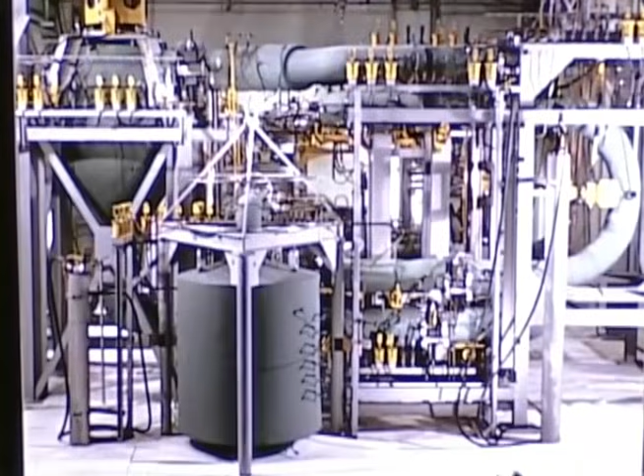Molten salt reactors for the production of electrical power were studied at Oak Ridge National Laboratory from 1957 to 1960. Design studies and technological developments strongly indicated that molten salt breeder reactors operating on a thorium cycle could be developed to produce low-cost electricity and conserve our uranium resources.

A reactor experiment, however, was required to demonstrate the feasibility of this unique high-temperature fluid fuel reactor concept. As a result, the United States Atomic Energy Commission in 1960 authorized the laboratory to design, construct, and operate the Molten Salt Reactor Experiment, also known as MSRE.

Preliminary design of the reactor began in May 1960. Technology developed by the earlier Aircraft Nuclear Propulsion program at the laboratory was used as a basis for designing the MSRE.

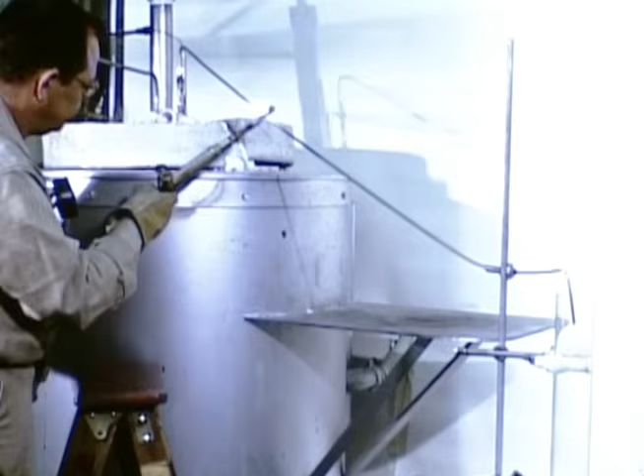The molten salt fuel for this reactor is radically different from that used in solid fuel reactors. Here, salt flows from a pipe which is heated to keep the salt molten. At 1200 degrees Fahrenheit, the salt does not react with air. It flows like water, but does not boil.

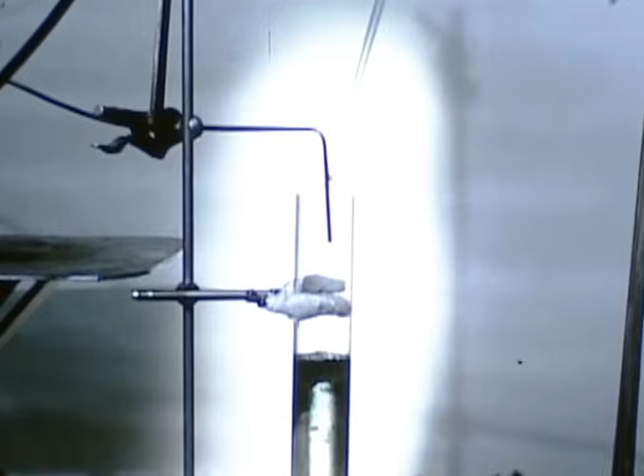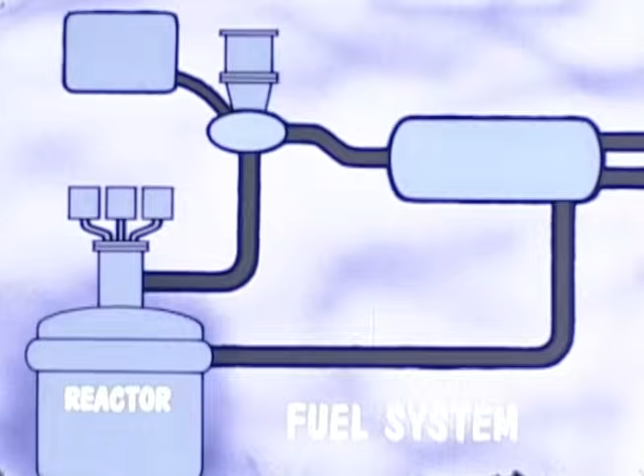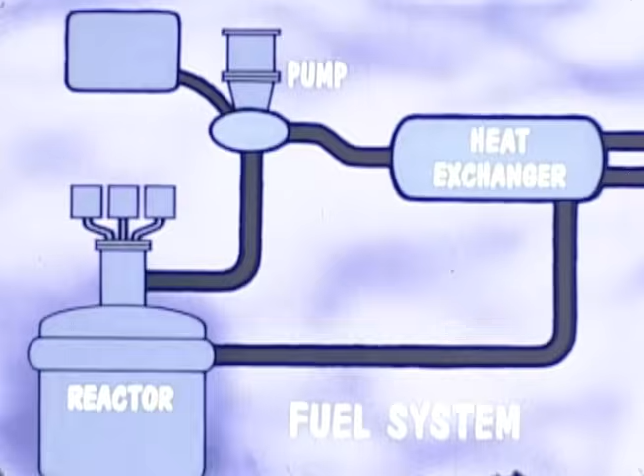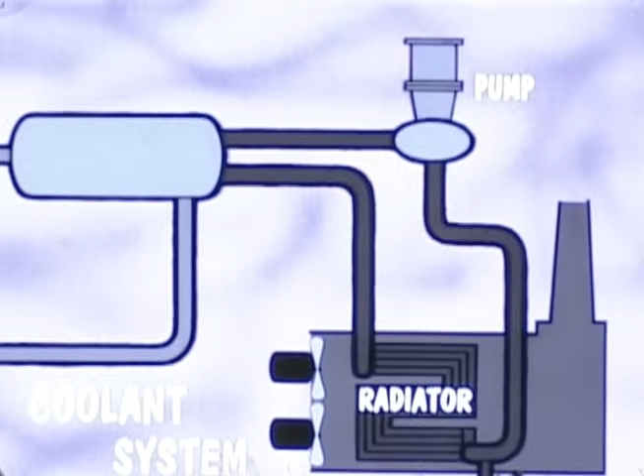The Molten Salt Reactor Experiment utilizes a fuel system which includes the reactor core, in which heat is generated, a heat exchanger for transferring heat from the fuel salt to coolant salt, a sump-type centrifugal pump for circulating the fuel, 3 salt storage tanks, and the connecting piping. The MSRE coolant system consists of a circulating pump, a salt-to-air radiator, a salt storage tank, and the connecting piping.

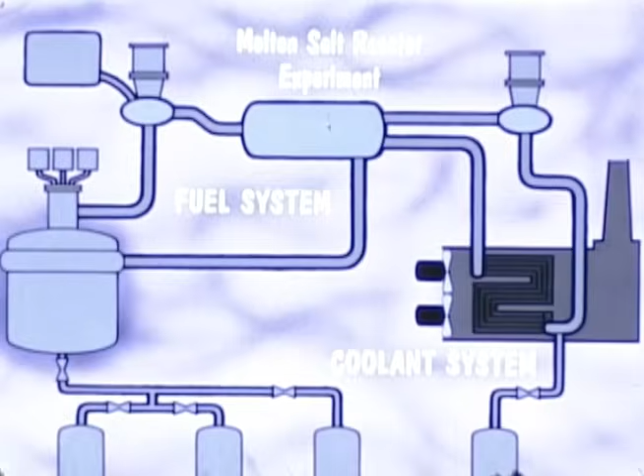Both systems were designed for 1300 degree Fahrenheit temperature and 50 psig pressure. MSRE is a circulating fuel, graphite moderated, single region reactor capable of generating 7,500 kilowatts of heat.

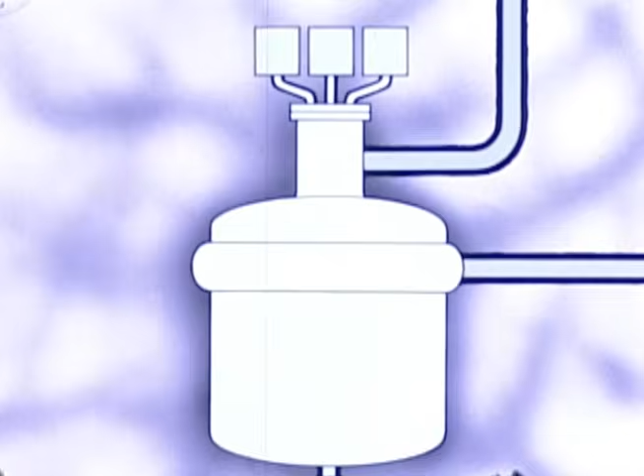During operation of the reactor, the fuel, which is nearly as fluid as water at the elevated temperature of 1170 degrees Fahrenheit and 20 psig, enters the flow distributor near the top of the vessel and spirals downward in turbulent flow through the space between the vessel and core can.

The fuel is then directed upward in laminar flow through channels machined in graphite bars of the core matrix, where heat is generated by the fissioning of uranium-235. The fuel leaves the reactor 40 degrees hotter than it enters.

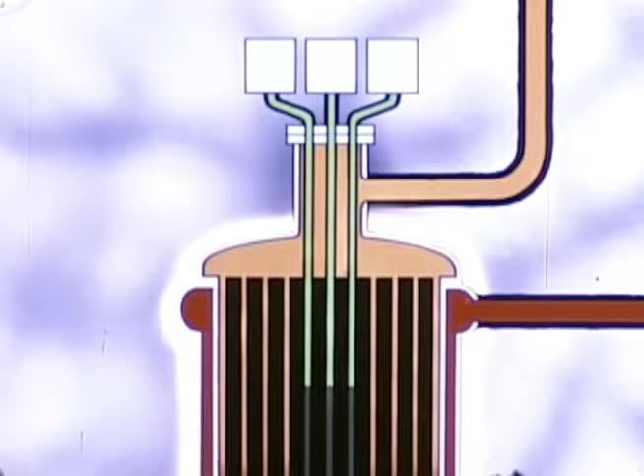A simple control system of 3 flexible control rods helps to regulate the power and temperature. The fuel pump, operating at 1,200 gallons a minute, obtains its suction directly from the reactor.

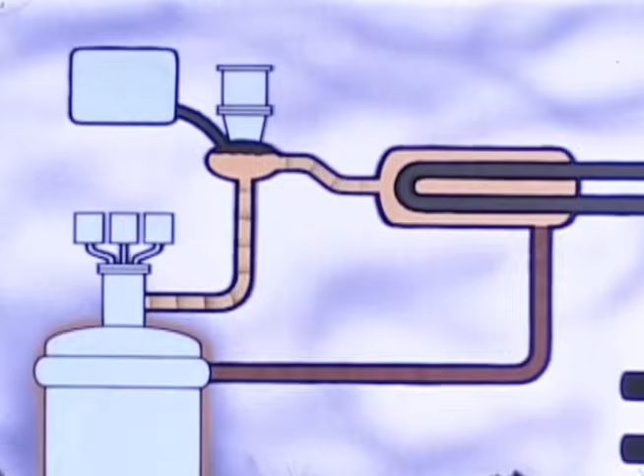At maximum power, the salt, which is now 1,210 degrees Fahrenheit, is discharged by the fuel pump and flows through the primary heat exchanger and then back to the reactor. Gaseous fission products, which interfere with the chain reaction, are removed from the circulating salt stream in the pump tank.

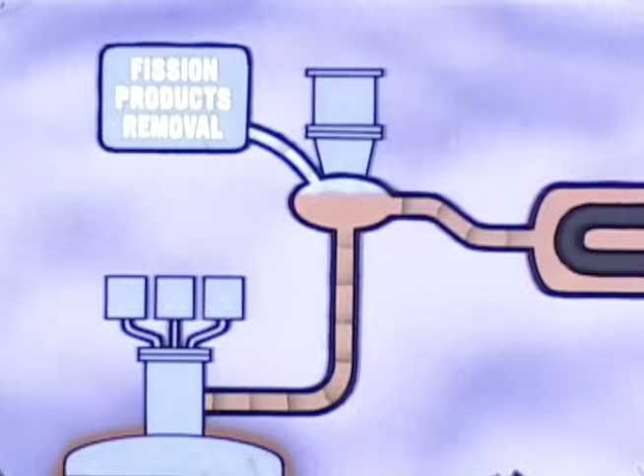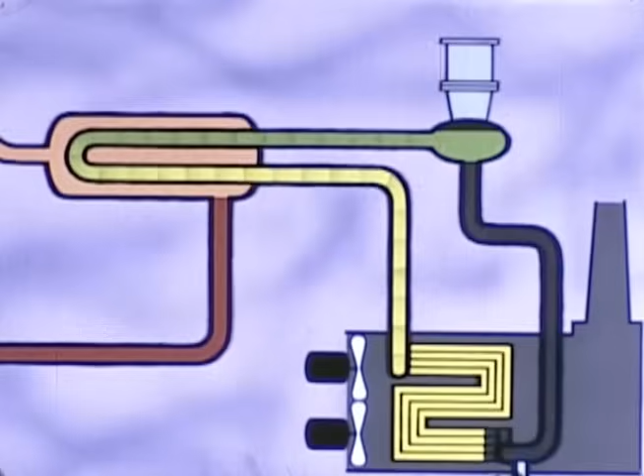The coolant salt is circulated by a sump-type centrifugal pump, similar to the fuel pump. It flows through the heat exchanger and leaves at 1,070 degrees Fahrenheit after a temperature rise of 60 degrees. Heat from the coolant salt is transferred to air in the radiator. Supplied by axial flow blowers, the cooling air is forced across the radiator and up the stack.

Major components of the fuel and coolant salt circulating systems are connected by 5-inch piping and smaller fill and drain lines. During operation of the reactor, the molten salt is held in the whole system by special freeze valves.

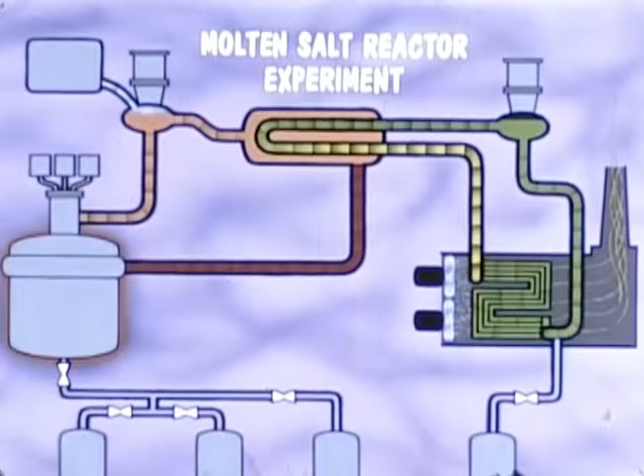The fuel, solid at room temperature, is composed of lithium, beryllium, zirconium, and uranium fluoride salts. A third of the uranium is fissionable U-235.

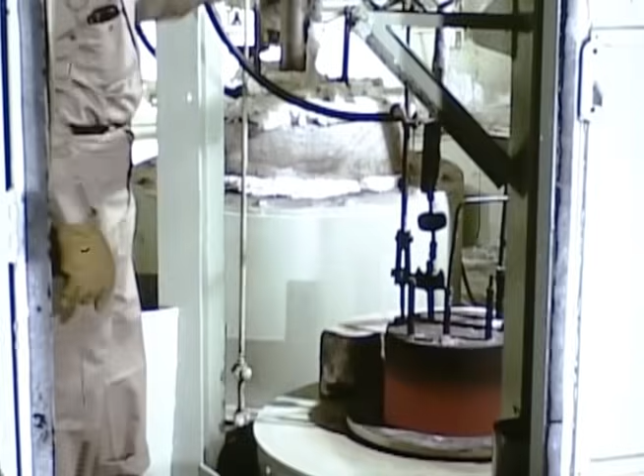The coolant is a fluoride salt mixture like the fuel, but it does not contain uranium or zirconium. These mixtures were produced at the laboratory by using techniques developed during the Aircraft Nuclear Propulsion program.

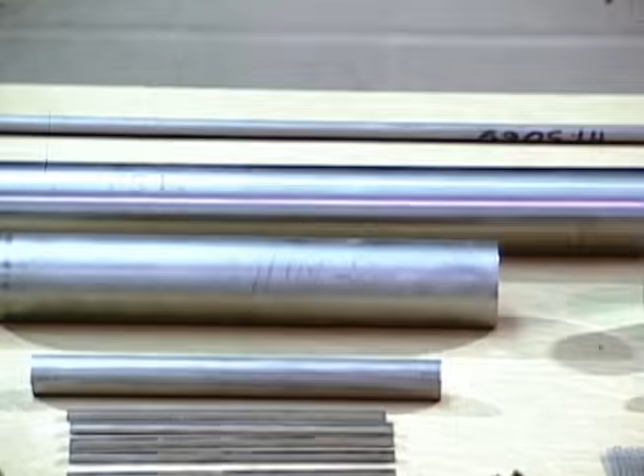The salt-containing piping and components are fabricated from Hastelloy N, a special nickel-molybdenum alloy developed at Oak Ridge, which has good resistance to corrosion attack by fluoride salts up to 1500-degree temperatures.

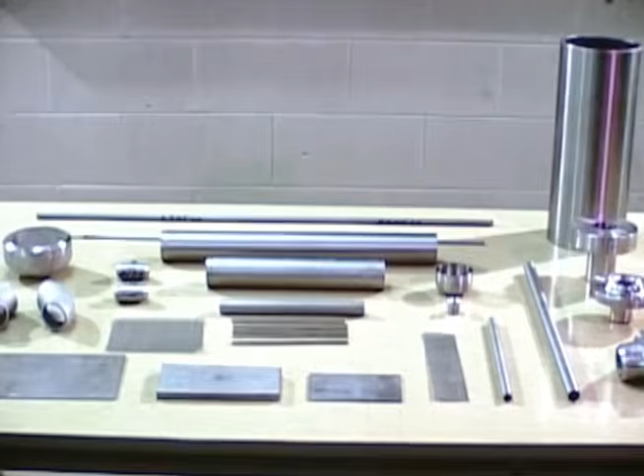The MSRE was designed to utilize the 1954 Aircraft Reactor Experiment facilities. The ARE was the first molten salt reactor to use circulating fused fluorides as fuel. It operated at 2,500 kilowatts in this building.

Building modifications extended from early 1961 through mid-1962. The MSRE fuel storage cell and other areas are new, but most of the former facility was modified only slightly.

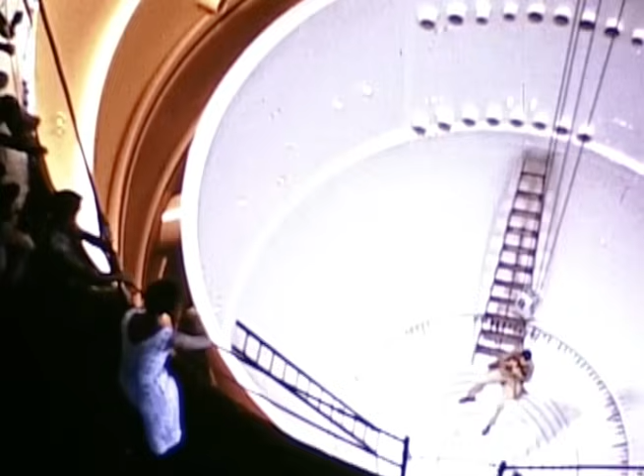The fuel circuit steel containment vessel, 24 feet in diameter, had to be lengthened. It was then stress relieved by gas heating.

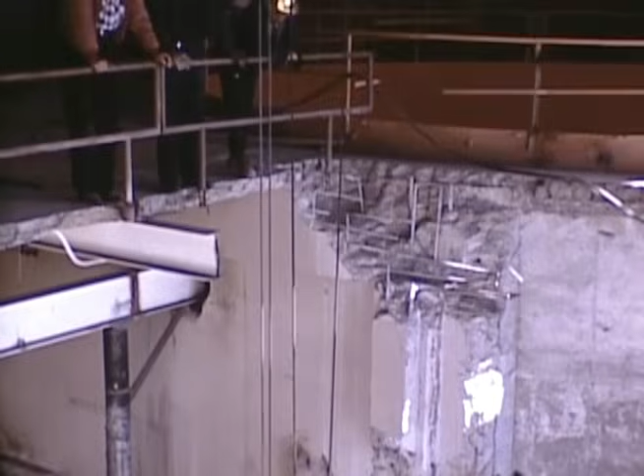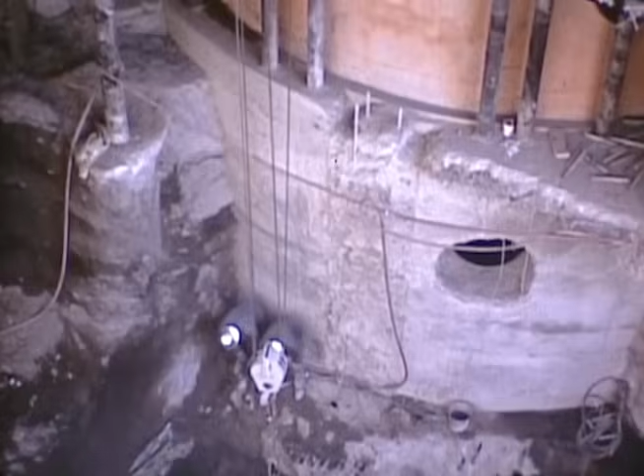The vessel is located in another cylindrical steel shielding tank. For biological shielding, the lower portion of the annulus between the tank and vessel was filled with magnetite sand and water, and the upper end with magnetite concrete.

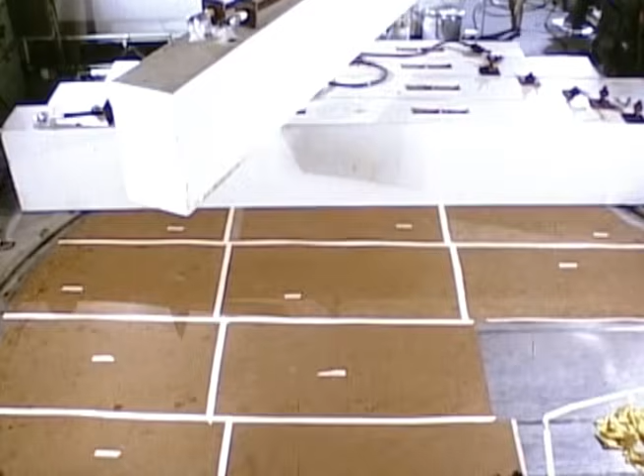The cover for the containment vessel consists of 2 layers of 3.5-foot thick magnetite concrete blocks, separated by a welded stainless steel membrane. The concrete serves as a biological shield and as a support structure for the pressure-tight cell.

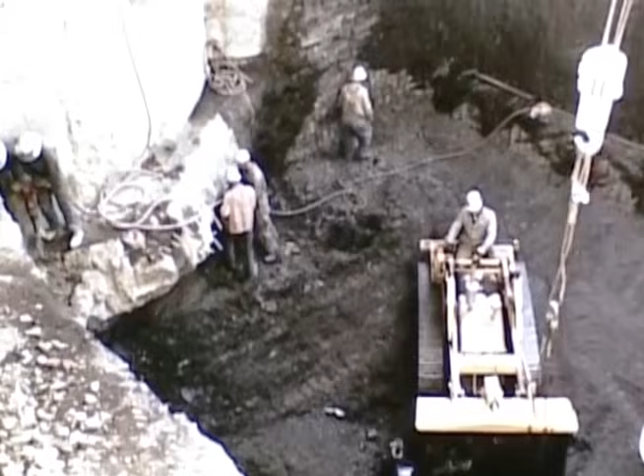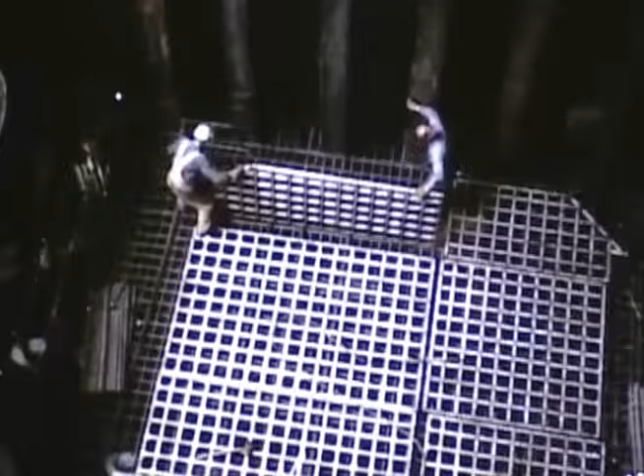Considerable excavation was necessary at the fuel storage cell to permit gravity drain of fuel from reactor to storage tanks. The cell's bottom and sides are stainless steel, backed by heavily reinforced concrete. This pressure-tight cell is also covered with 2 layers of reinforced concrete blocks separated by a welded stainless steel membrane seal.

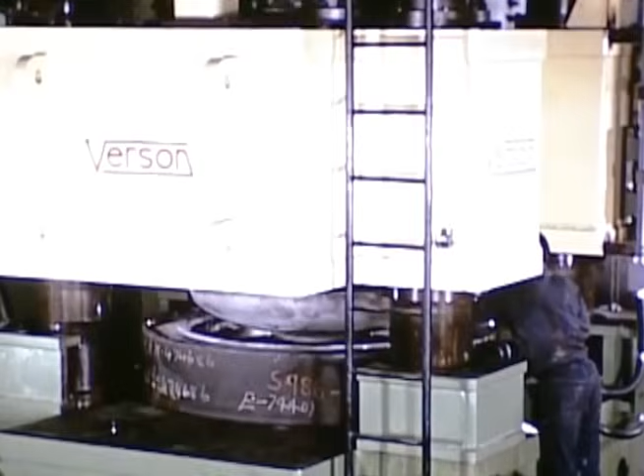Dished heads for the reactor vessel were cold pressed from 1 1/8 inch thick Hastelloy N alloy plates. The reactor vessel's fuel inlet flow distribution channel was also cold formed, as were most of the Hastelloy N alloy parts.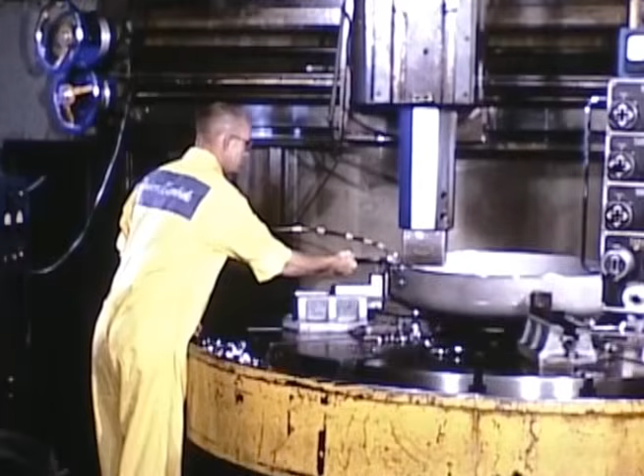Some development work was needed to fabricate major components. It was found generally that Hastelloy N presented no more problems than other high nickel alloys or stainless steel.

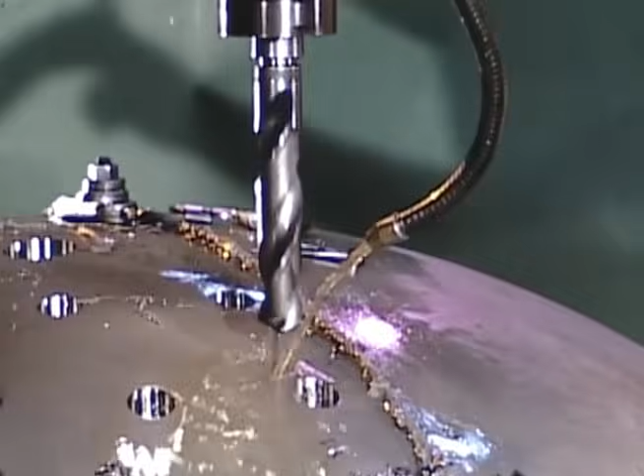Assembly of the reactor vessel began in mid-1962.

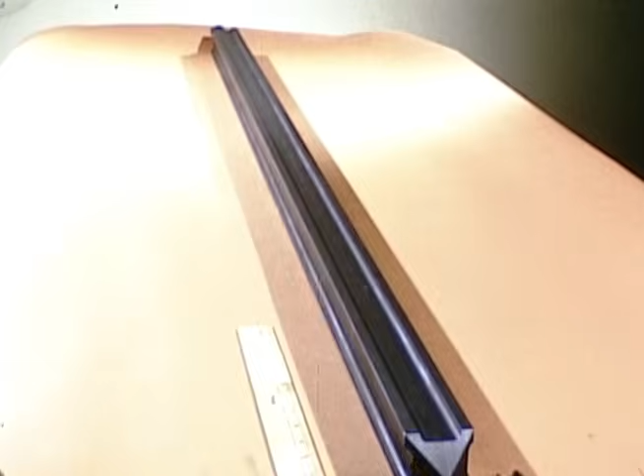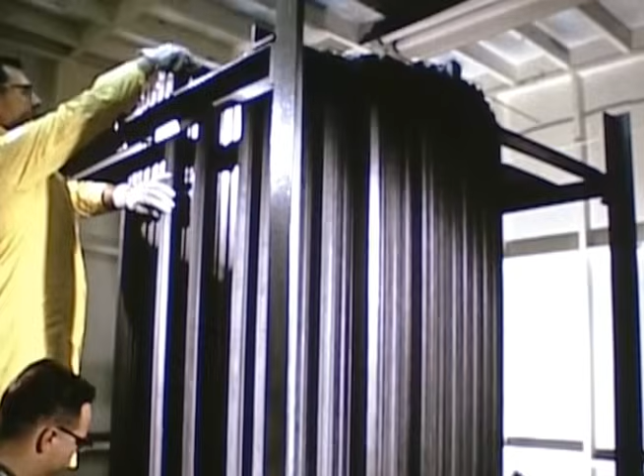By the fall of 1963, special graphite, with low salt absorption and low permeability to gases, had been commercially produced and precision machined. The reactor core of nearly 600 vertical graphite bars was carefully assembled on a graphite lattice within a clean room.

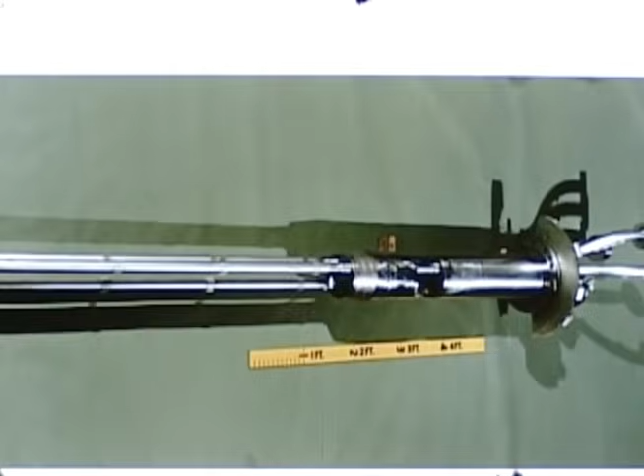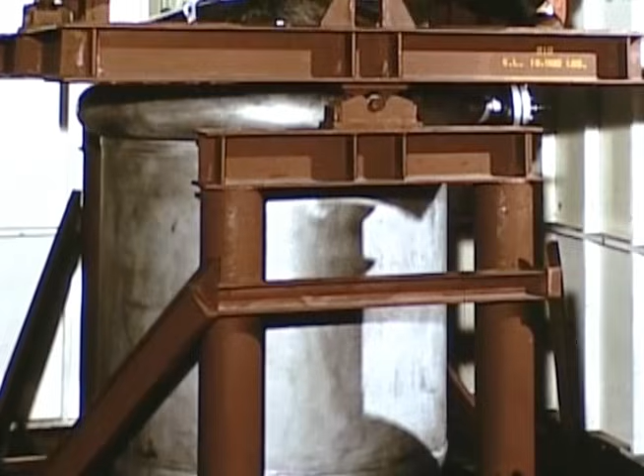A removable control rod thimble assembly for the reactor was fabricated separately. The 5-foot diameter reactor with core and control rod assembly weighs about 9 tons. This special shipping fixture held the reactor vertical during its journey from shop to reactor site.

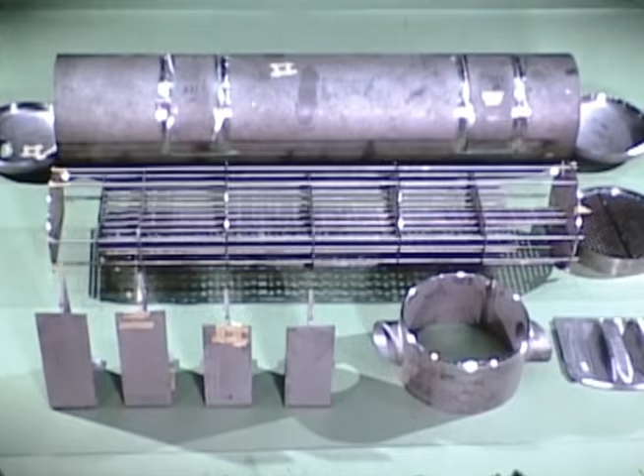The horizontal shell and tube primary heat exchanger is about 8 feet long. Its U-shaped tubes, a 1/2 inch in diameter, were fusion welded and furnace back brazed in a hydrogen atmosphere to the tube sheet. The bundle contains spacer bars tightly laced in 2 directions through spaces between the triangular pitched tubes to eliminate flutter and vibration.

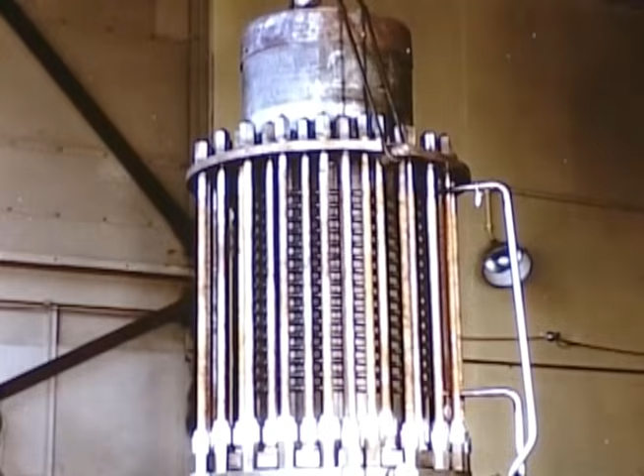The fuel salt pump bowl serves as the pump sump and surge volume to allow for expansion of the salt. This fuel pump rotary element with water-cooled drive motor, bearing assembly, bolt extensions for remote replacement, and impeller circulated molten salt at 1200 degrees during the non-nuclear run-in test.

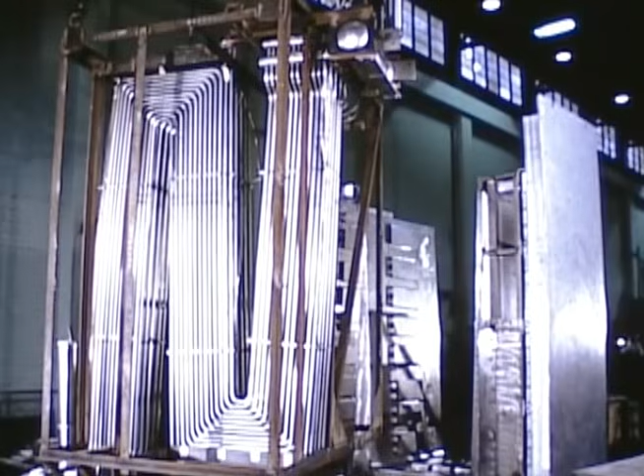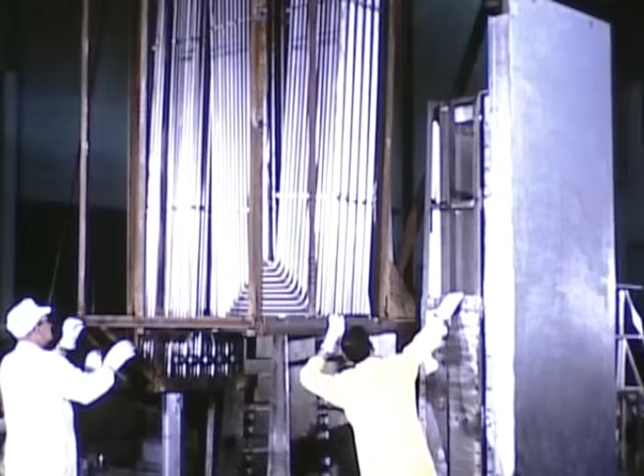The salt-to-air radiator tubes, each 3/4 of an inch in diameter, are arrayed in banks of 12 tubes each. Special assembly fixtures were required to accurately position the tube banks and subheaders for welding and assembly. The radiator enclosure and coil were fabricated separately, then assembled after removing one end of the enclosure.

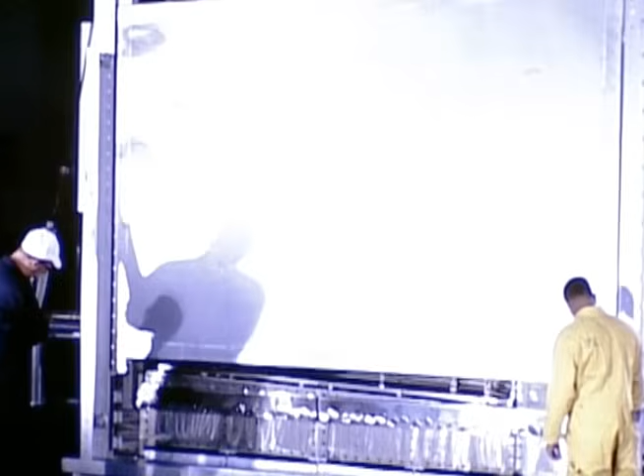The enclosure, which supports the radiator coil, is a furnace containing electric heaters to prevent uncontrolled freezing of the salt. Adjustable doors and dampers control airflow through the radiator to regulate heat removal.

Tanks provide safe storage of salt mixtures when the fuel and coolant salt circulating systems are not operating. These include 2 fuel storage tanks with bayonet tubes and steam dome in which fission product decay heat is removed by flashing water to steam.

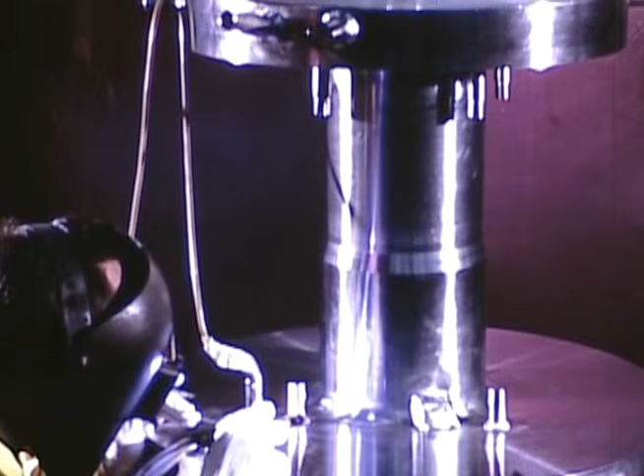Several thousand high-integrity reactor-quality welds of Hastelloy N alloys were made during fabrication of major components. The history of each was recorded for future reference.

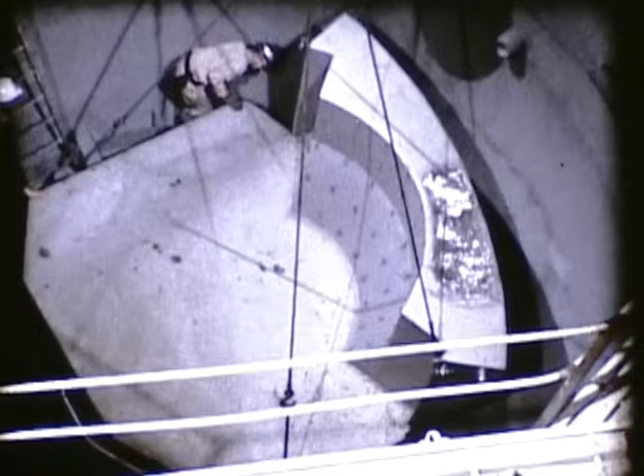Installation of fuel circuit equipment in the reactor cell began in January 1963 with the placement of the thermal shield base and cylindrical section. The thermal shield is a double-walled stainless steel vessel which surrounds the reactor and shields equipment in the cell from neutron fields.

The annulus is filled with water and carbon steel balls for primary shielding. The shield also provides a support for the reactor vessel.

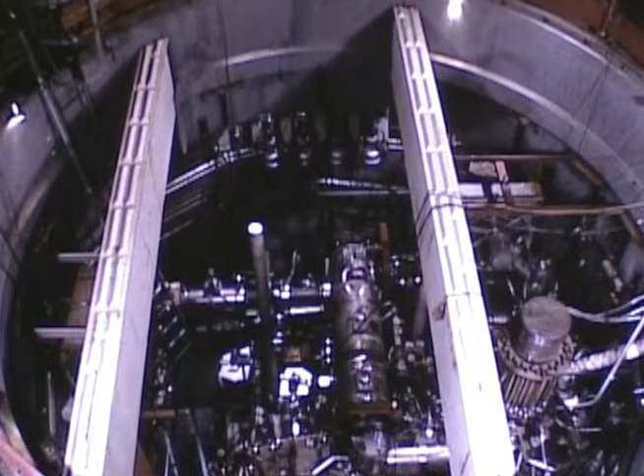One objective of the MSRE was to ensure remote replacement of all equipment in the reactor cell. To locate equipment during installation and replacement, a large assembly fixture was constructed outside the cell on which the reactor, fuel salt circulating pump, primary heat exchanger, and connecting piping and disconnects were accurately located by optical tooling methods.

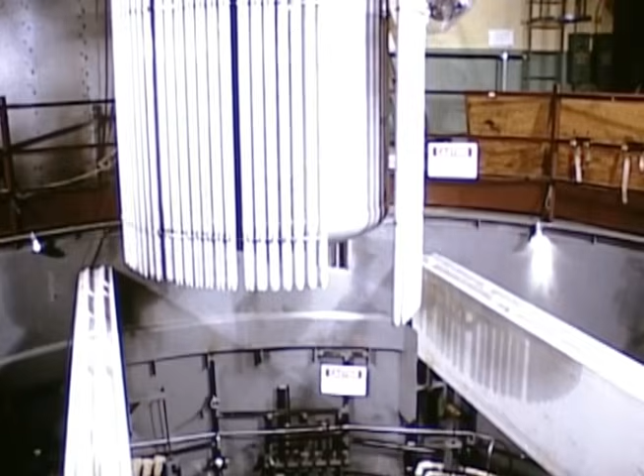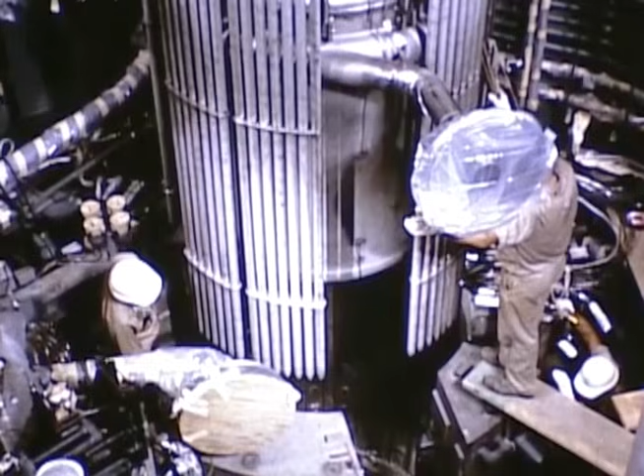After the connecting piping and auxiliary equipment were attached by using the fixture, the reactor was lowered into the thermal shield. Connecting pipe bends and welds were normalized at a temperature 450 degrees higher than normal salt operating temperature to minimize movement of pipe disconnects after the fuel salt had circulated.

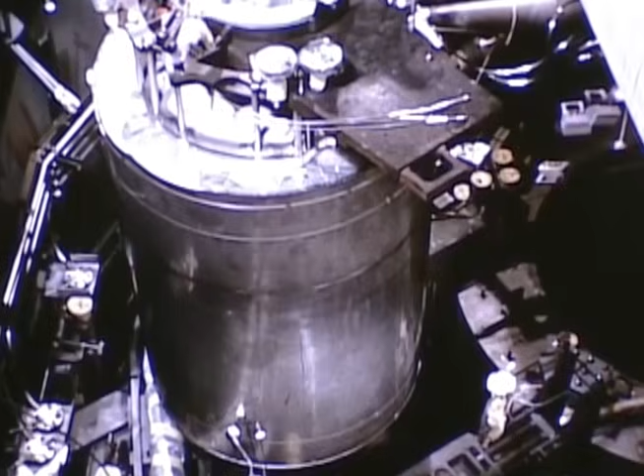The same procedure was followed for the fuel salt circulating pump bowl and furnace. Installation of the pump was completed with the addition of the pump rotary element, drive motor, auxiliary piping, and electrical connections.

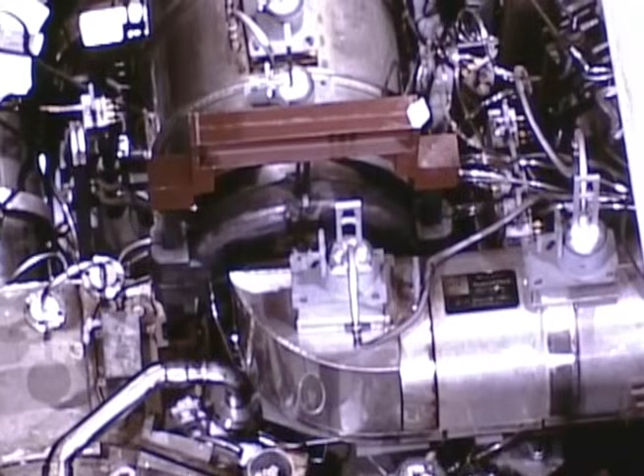Special freeze flanges in the fuel salt circulating piping permit the removal and replacement of major components, such as the heat exchanger.

All components and connecting piping in the salt circulating systems are heated electrically to maintain the system above the salt freezing point of 840 degrees. The equipment is preheated before salt is added.

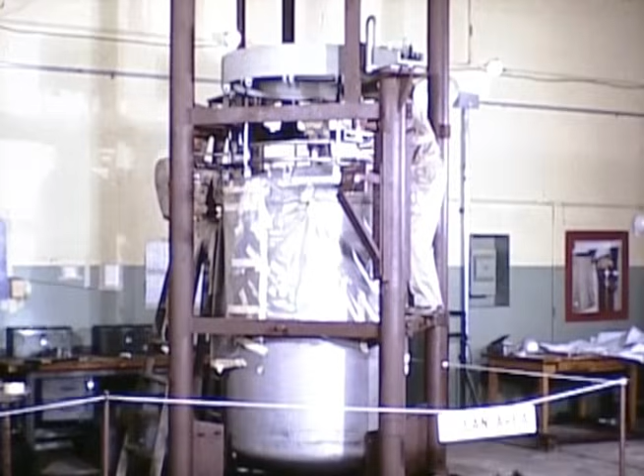The fuel storage tanks and related equipment were installed by using assembly fixtures, and the same procedure was utilized for the main fuel circuit.

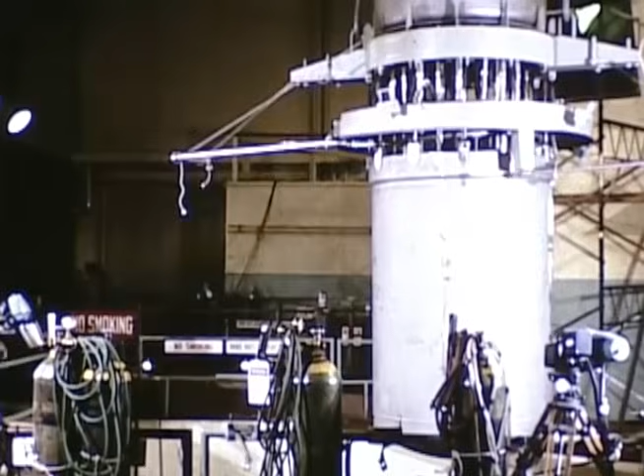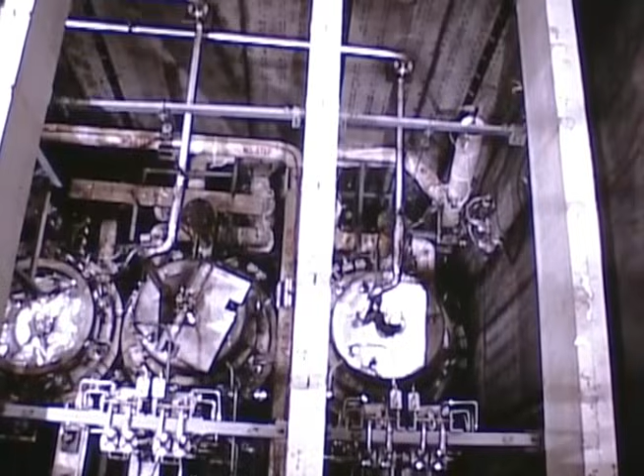The fuel storage tanks with steam cooling systems were positioned inside the electric furnaces. The salt piping and all auxiliary services, including instrumentation and controls, were thoroughly checked for leaks and electrical continuity.

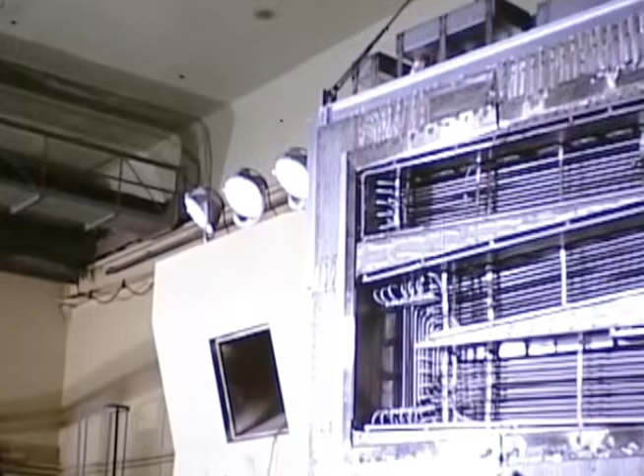Since heaters and thermocouples as well as the coil were installed in the radiator enclosure at the shop, no additional work was required before the radiator was placed in the coolant cell. Installation of the radiator, salt storage tank, and circulating pump completed the coolant circuit.

The MSRE incorporates some novel features and components designed and developed specifically for molten salt reactors. Performance data on these items permit the evaluation of ideas and principles which might be employed in breeder-type molten salt reactors.

It is planned to remove impurities and recover uranium from the fuel salt in this on-site processing facility.

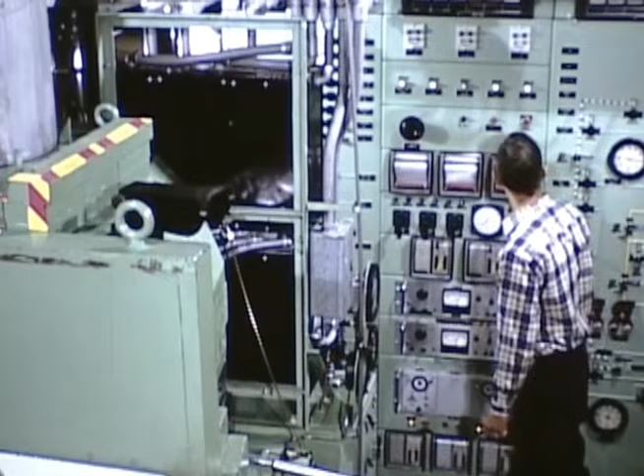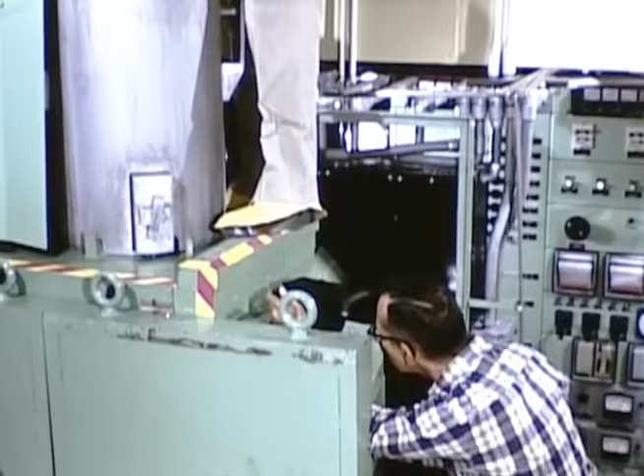The sampler enricher is a unique device for sampling and adding fuel during full power operation of the reactor. A power-driven cable remotely lowers a small bucket into the liquid salt of the pump bowl, and then raises the bucket into a manipulator area for transfer to a shielded container.

More than 300 samples have been obtained routinely by this method.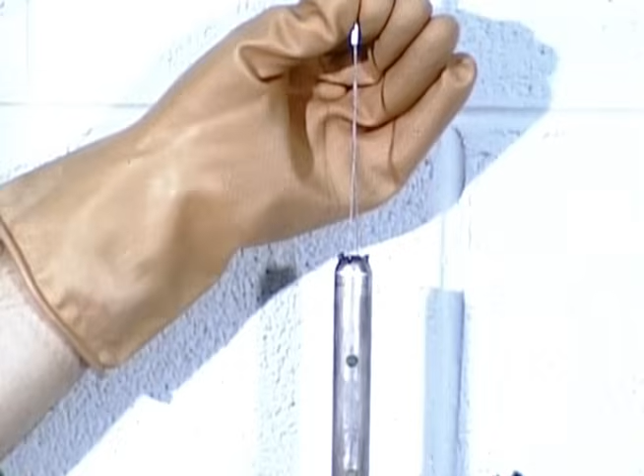When needed, fuel is enriched by lowering a bucket of enriched U-235 and dissolving it into the circulating fuel salt stream. This eliminates the need for excess fuel reactivity. The fuel has been enriched 3 times by adding 114 buckets of enriching salt.

Another feature of the MSRE is its high-speed digital computer. The computer does not exercise direct control over the reactor, but collects and displays data and performs online calculations for immediate and long-range purposes.

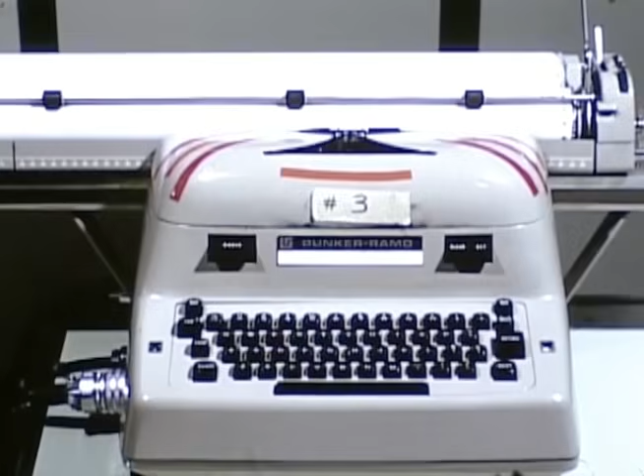With the final addition of 680 grams of enriched uranium into the fuel stream by the sampler enricher, the molten salt reactor experiment went critical on June 1st, 1965.

Low-power nuclear experiments lasted about a month. After final preparations, power operations began early in 1966.

During the year ending in January 1968, the reactor was critical over 75% of the time, producing nearly 41,000 megawatt hours of heat. By this time, many of the test objectives had been reached.

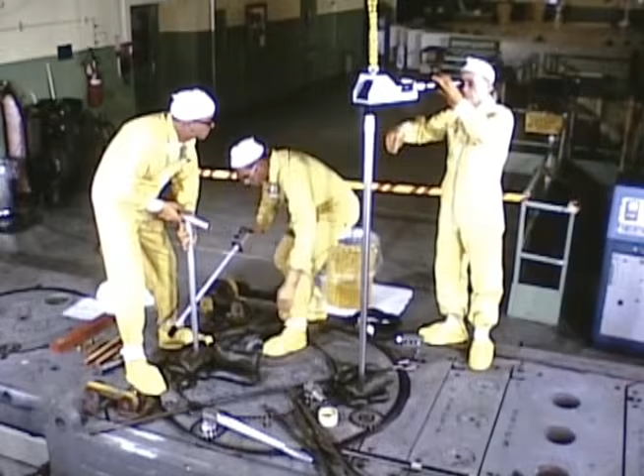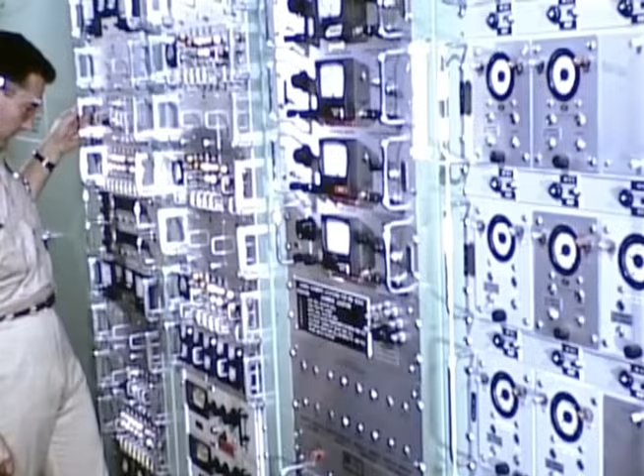It has been demonstrated that MSRE can be operated safely and reliably, and that maintenance of radioactive equipment has been accomplished with minimum difficulty. Nuclear characteristics were extremely close to predicted values, and the system was dynamically stable at all power levels.

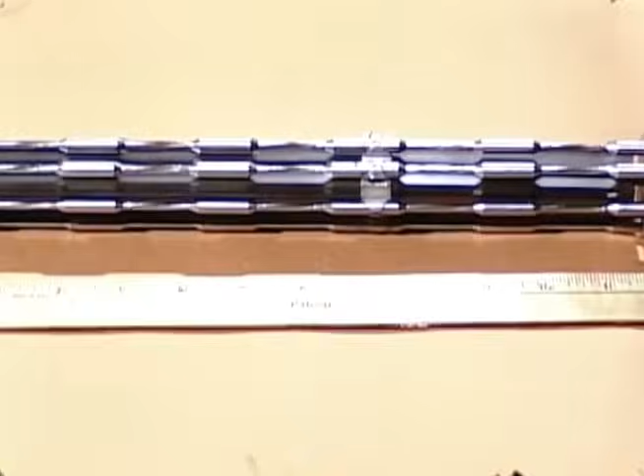Graphite and Hastelloy N specimens similar to these have been removed from the fissioning fuel stream in the reactor core. Examination of specimens in hot cells indicated no deleterious corrosion or structural change after salt had been circulated in the fuel system for more than 6,000 hours.

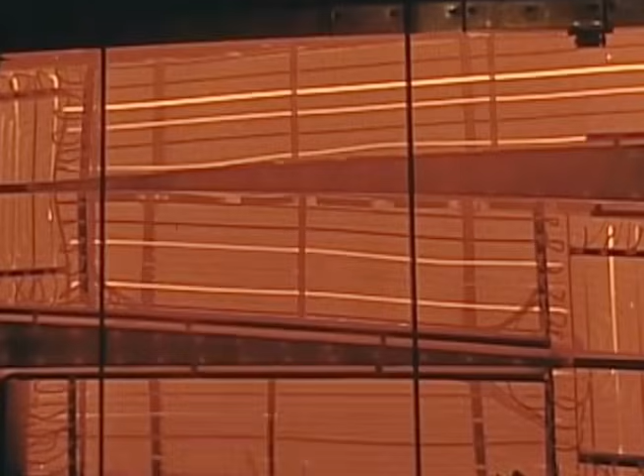In that time, the fuel proved to be stable to radiation and heat. The reactor, with its 1200-degree core outlet temperature, is one of the highest temperature reactors operating today.

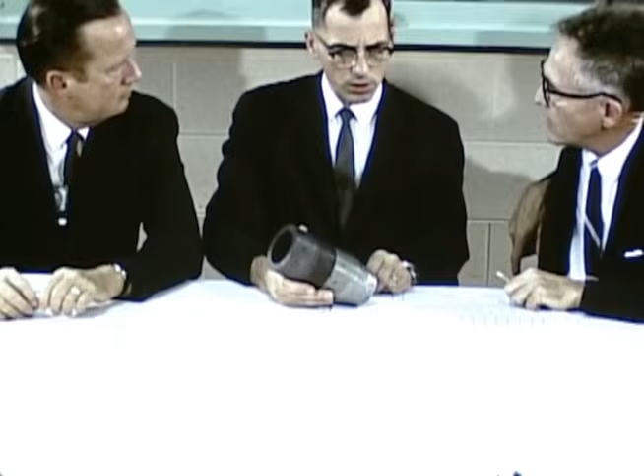As a result of this success, ORNL is proposing to develop a thermal breeder reactor. This is one which produces more fissionable material than it consumes. Thermal breeders have many practical construction and operating advantages, and the molten salt reactor appears to be a very attractive thermal breeder.

Molten salt thermal breeders should have a low inventory of fissionable material, which means that the amount of uranium needed to fuel the reactor is low.

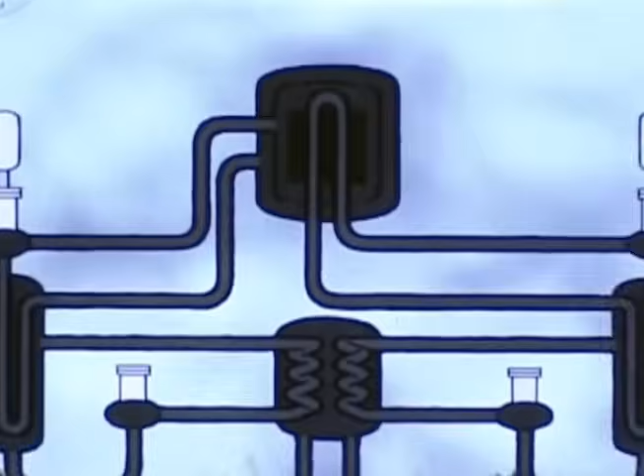In the design of a 2-fluid molten salt breeder, the fuel salt mixture of lithium, beryllium, uranium fluorides is pumped through graphite tubes in the reactor core, where heat is generated by fissioning of uranium, and then through the primary heat exchanger, where the heat is extracted.

The fertile or blanket salt surrounds the core where additional heat is generated. It is then pumped through the blanket heat exchanger, where this heat is extracted.

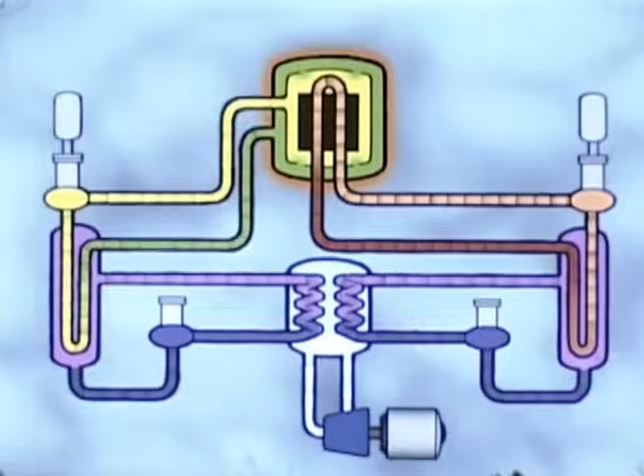The blanket salt mixture contains thorium, which is converted to fissionable uranium atoms more rapidly than they are consumed in the reactor fuel. The heat produced in the fuel and blanket streams is transferred by an intermediate salt heat transfer system to a supercritical steam-generating electrical system.

In an alternative design, one salt containing thorium and uranium circulates through the reactor vessel and heat exchangers. This simpler single-fluid reactor is also a promising breeder if problems of on-stream fuel processing can be solved.

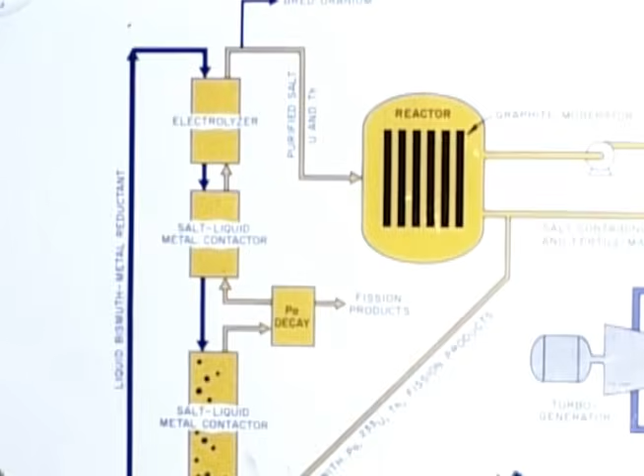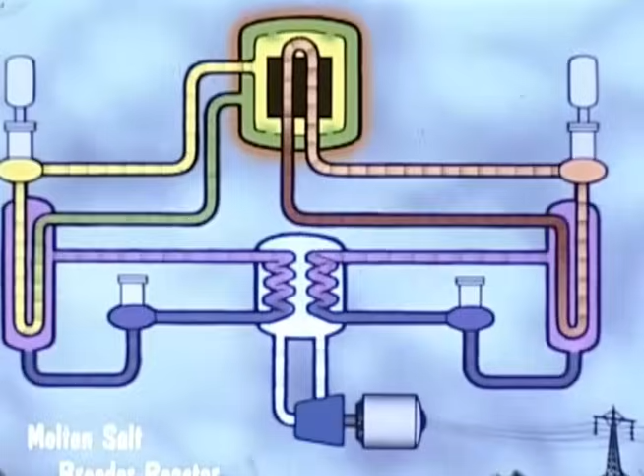ORNL studies indicate that molten salt breeder reactors should be able to produce electricity at low cost and with the high efficiencies of modern steam plants. Thus, the laboratory's important goals of nuclear reactor development converge in the molten salt breeder reactor.

The search for a stable fuel at high temperature, the urge for fluid fuels, and the capability of providing an infinite supply of electrical power at low cost.